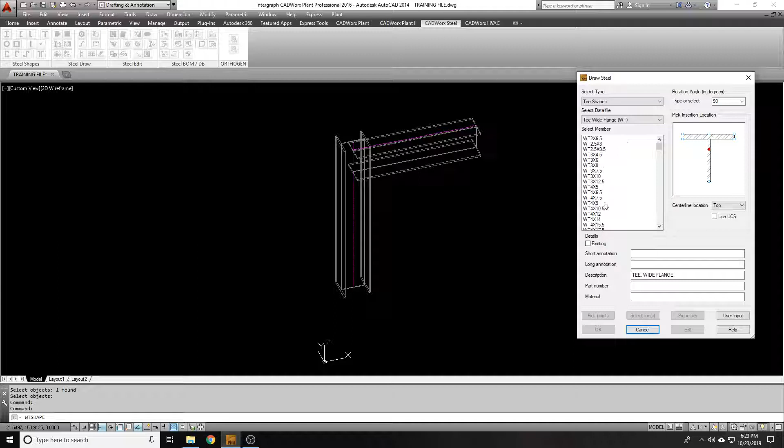We're going to insert a T shape, we'll do horizontal first. You've got your standard T's, MT's, and then we're going to do the wide flange T's, which are your more common ones, something like a WT 4x9. You may see this as like a support off the side of a structure. Oops, let me go and click that again.

And it was my rotation at 90. It should be at 0. I think I had it previously set at 90. All right, so there's like a little T support hanging off the side.

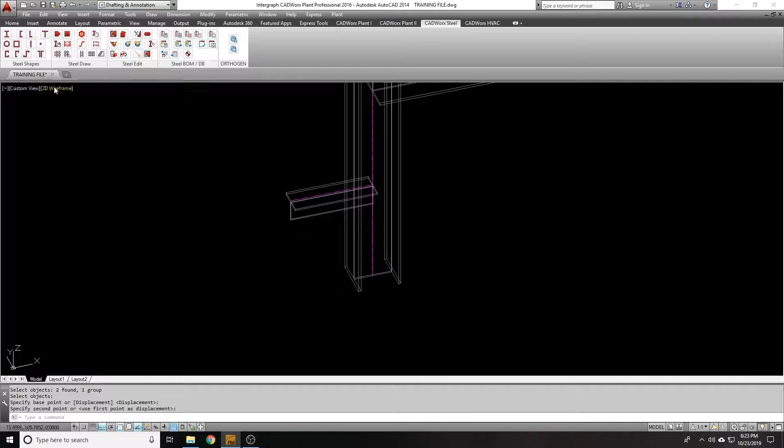Insert them the way you would anything else. Since T's are halves of the respective beams they came from, the WT 4x9 being a half of a W8x18, they're going to share the same gauge line. So you don't have to worry about different gauge lines. They're going to share the same 2 3/4 or something.

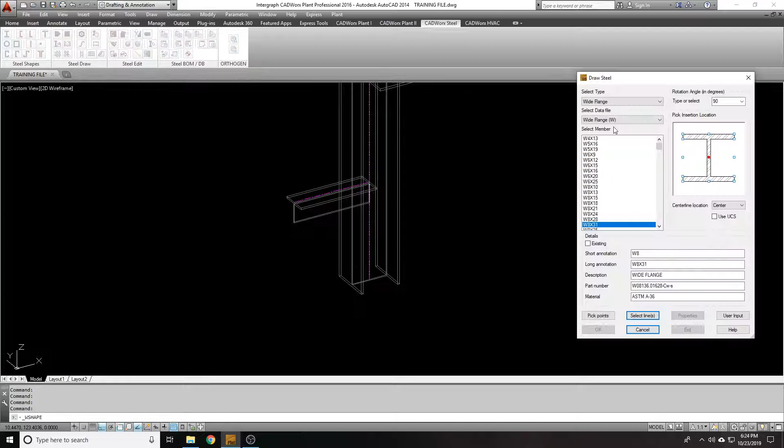And again, I think I might have mentioned this earlier. If I didn't, you won't always have that information you need. There is no gauge line shown for a WT4x9, but there is for 818, and 818's gauge line is, I want to say it's 2 3/4. So the gauge line for the top of this WT 4x9 is also going to be 2 3/4.

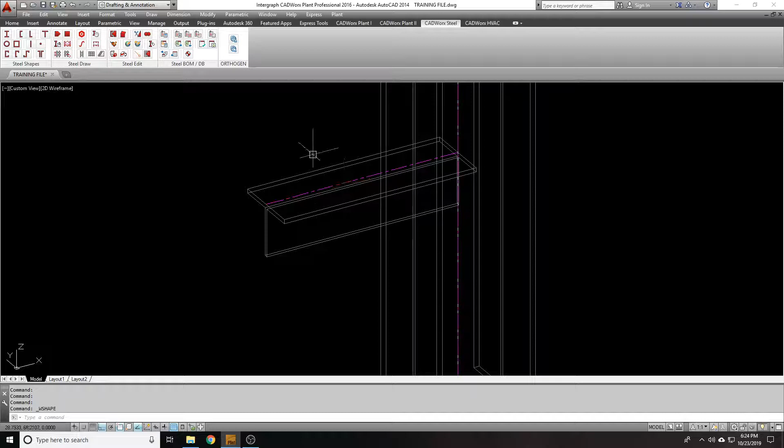In addition, I believe WTs also have web gauges, so you have to look into that as well. So if there's a web gauge, actually there is a web gauge, I just don't know it offhand. And they definitely don't show that anywhere in here.

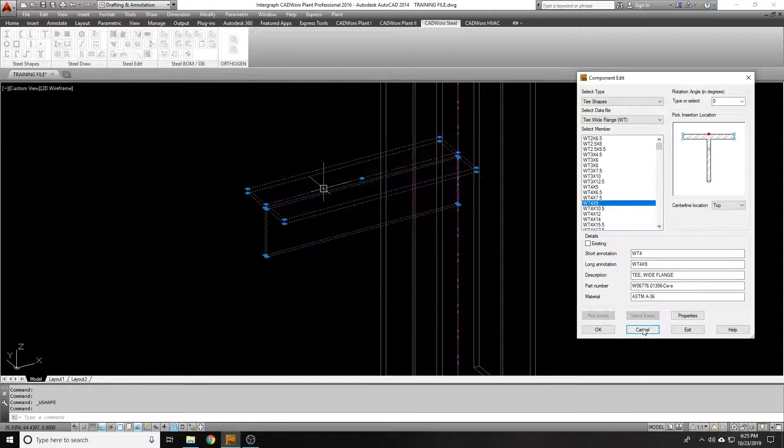Yeah, so look that up. Look at whatever the web gauge is, that'll be used. So there's two different types of connections for T's to be used in bracing.

Your rotation works just like the wide flanges. You're going to rotate on the center line, whatever your rotation angle is. The nice thing is, unlike channels and angles, there's no flip flange.

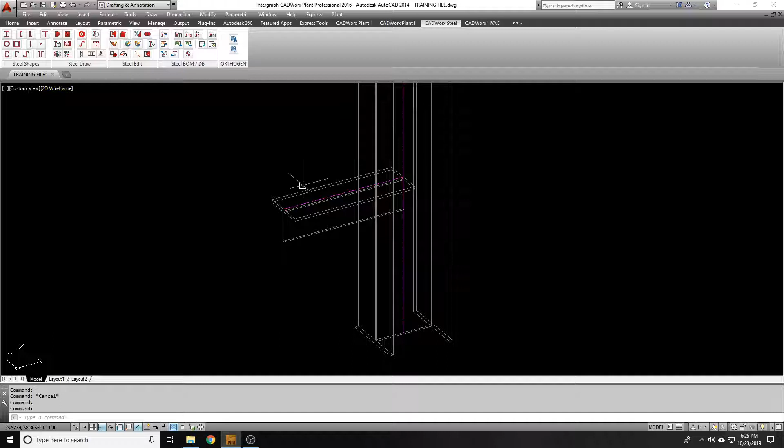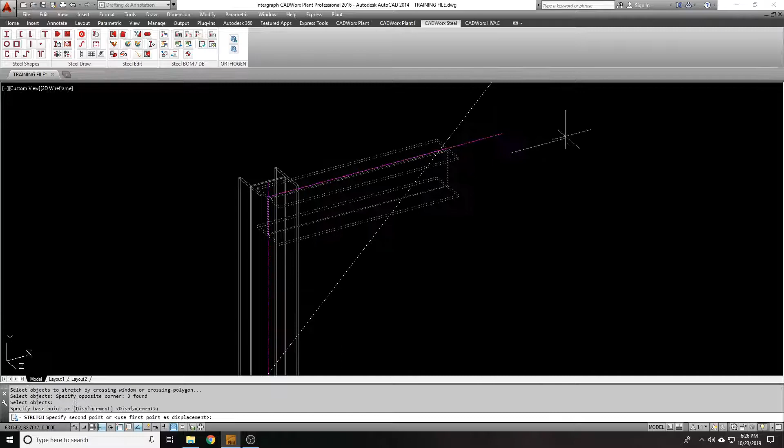So let's draw a work line, come up like a foot or 12 inches. Whatever, I'm in decimal still. And then set my UCS to the front, then say less than 45 and bring this up to here and bring this beam out. And you know how we do the braces, come down half the distance, so we're going to come down 4 and just do a fillet on that. All right, there's our work line for our brace, our wide flange brace.

Our T brace, wide flange T brace. So we're going to select this, and there's two ways to input a brace, and different companies will do this differently. And my streaming software is about to kick over. Okay, so there's two ways to do this.

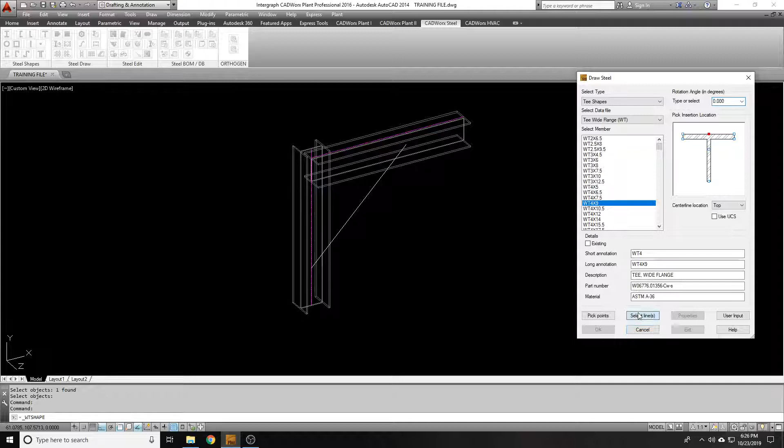The first way is just vertically, 0 degree insertion. This kind of connection is when you're going to bolt to the web of the T, and it's flange side up. We'll look at this in a conceptual. So some companies will do a connection like this. If it's welded, great, just cope it, which I'll get to later. You just cope it, and you're good to go. Welded, your work points in the center, all that jazz. You're good.

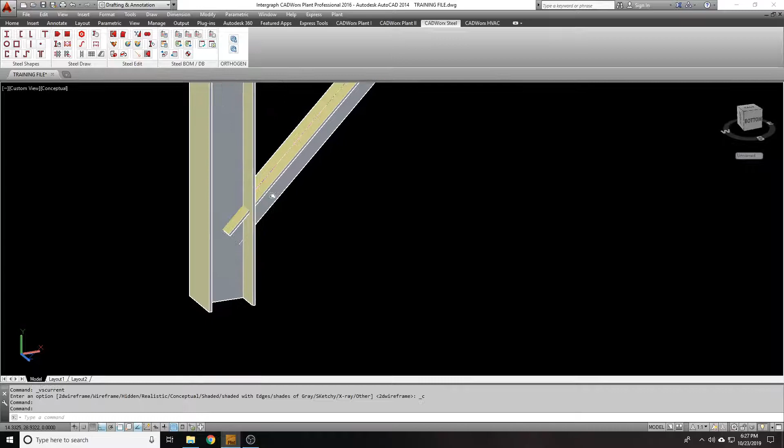If you're doing a gusseted connection, you can bolt along the gauge line on the web gauge. All right, the other type of connection.

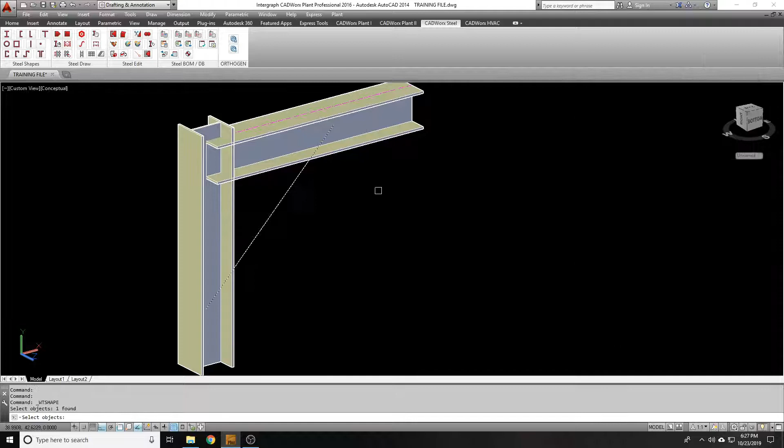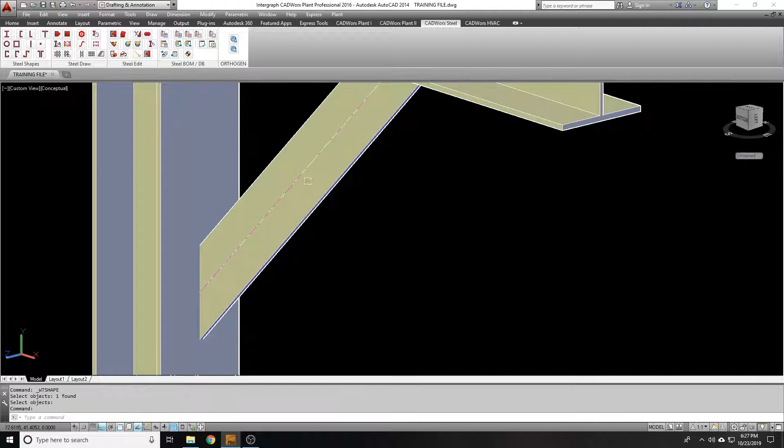Some companies will rotate it. We rotate it 90 degrees, and this could be 90 or 270, but it will not be 180. So select it, and you have it this way. Using this method, you'll have a gusset plate come off the column and the beam, and you'll have probably a 4-bolt, maybe a 2-bolt, but likely a 4-bolt gusset connection. Using the gauge of the T, which again matches the wide flange, so it's 2 3/4 in this case, you'll have the gauge where your bolts are at.

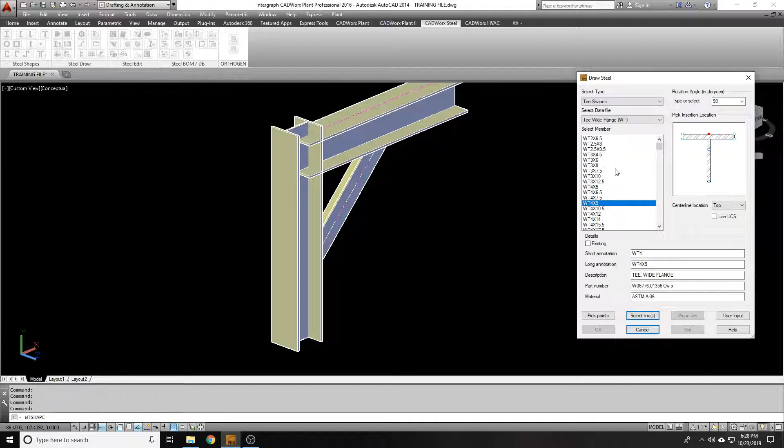So two methods to insert braces for T's. Pick your poison, whatever your company or engineer decides you use in those situations, we'll be good to go. So that's inserting T's. T's are pretty simple, there's not too much to say about them. They're a lot like wide flanges. I just want to go over how they can be used and how they will be used. So that's that.